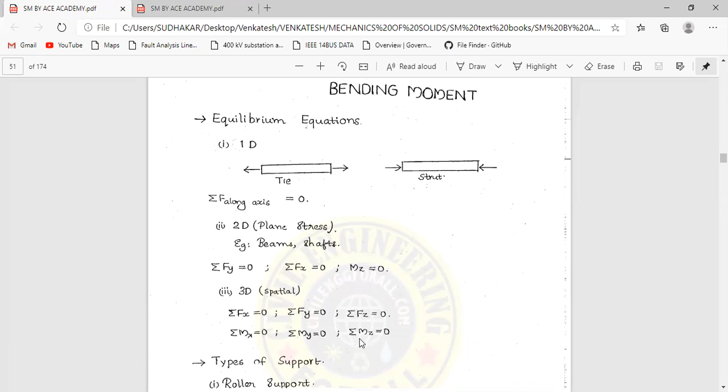For two dimensional, either summation of f of y equals 0, or summation of f of x equals 0, and moments about the particular z direction equals to 0. We have to consider three equations for the 2D case. If in case of 3D, we have to consider six equations. Six equations is nothing but the x direction, y direction and z direction, the forces along these three respective directions.

These respective directions: x, y, and z direction. So whenever for these 2D problems or 3D cases, we need to consider the equilibrium equations. Through these equilibrium equations we are going to find out the unknown values. Listen guys, got my point? I hope you understand.

So summation of f of x equals 0 for the 3D cases, summation of f of y equals 0 in case of y direction, summation of f of z equals 0. The respective forces along the respective directions equal 0, and at the same time the moments also: summation of moments about the x-axis equals 0, summation of moments about the y equals 0, summation of moments about the z direction equals 0. So these six equilibrium equations we need to consider for the 3D cases. For 2D cases, the three equilibrium equations we need to consider.

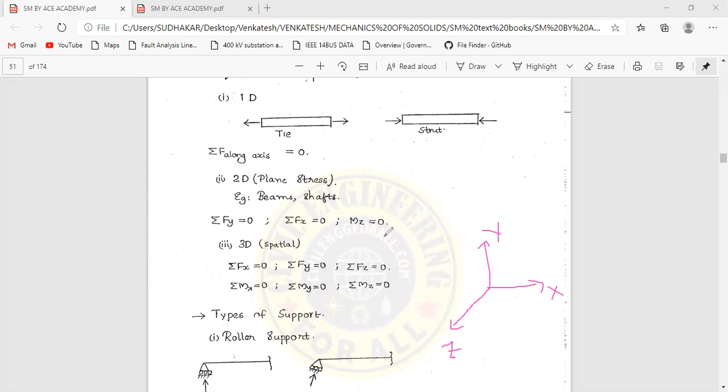Types of supports. First case, roller supports. The roller supports appear as shown in this display. So the roller support will be like this: a roller is there over which the beam is supported, and the roller can freely rotate about the base plane, about the base platform.

The next example is old bridges. If you have seen any old bridges, they contain some kind of rollers at the bottom of the beam. Some beams are there, some rollers are there under the beam, which tend to provide the main purpose of freely expanding its length in case of thermal stresses. In order to provide for thermal stresses we need to add roller supports.

Next one, hinge supports, and hinge supports are nothing but pin supports. In case of a roller support we have only one reaction force, which acts in the vertical direction, vertically upwards.

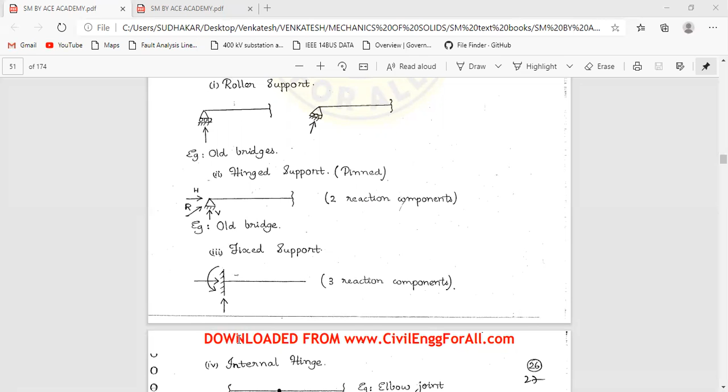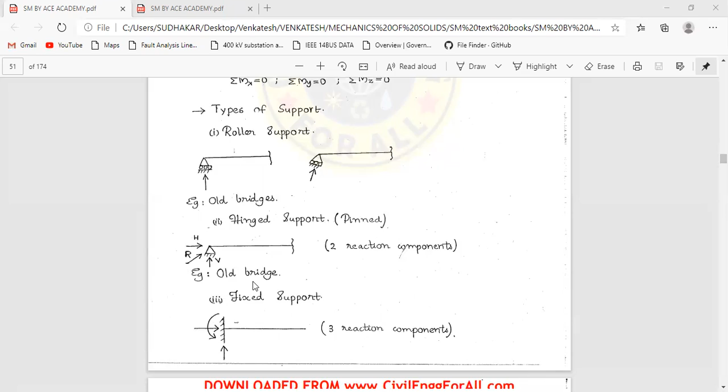Suppose one more support will be there: internal hinge. Is my screen visible please?

Internal hinge is nothing but, in between two members, we have a link which is internally hinged. This appears like an elbow joint for the human hand. Here the bending moment will be equal to zero - there is no bending moment there.

Shear hinges. The next type of support is shear hinges - axial shear hinges and transverse shear hinges. Whenever the shear force acts in a parallel, longitudinal axis direction, it leads to axial shear hinge. Whenever the shear force acts in a vertical or transverse direction, perpendicular to the axis - here this is the axis.

The shear force will also act in this direction, which is parallel to the line of action. This is the line of action. So here the axis of the line is in this direction, but the action of shear force will be in this direction, which is perpendicular to the previous one.

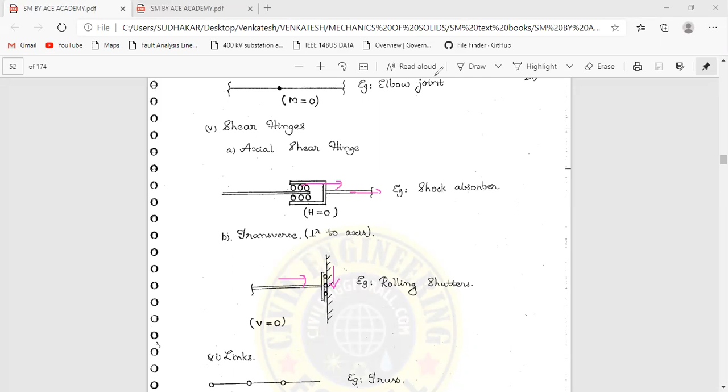Next, links - number of links. We can add any number of links based on the design constraints. The best example is the truss. In truss structures, like railway bridges which appear as trusses, number of links are added, used for making connections between two members.

So I have links like this one. Here I have one link, here one more link, here one more link, and here one more link.

So how many number of elements are here? 1, 2, 3, 4, 5, 6, 7. Out of the 7 elements, how many links did we use? 1, 2, 3, 4, 5. In order to make a connection between 7 members, we just use 5 links. By using the links we can make a joint also, as in truss examples.

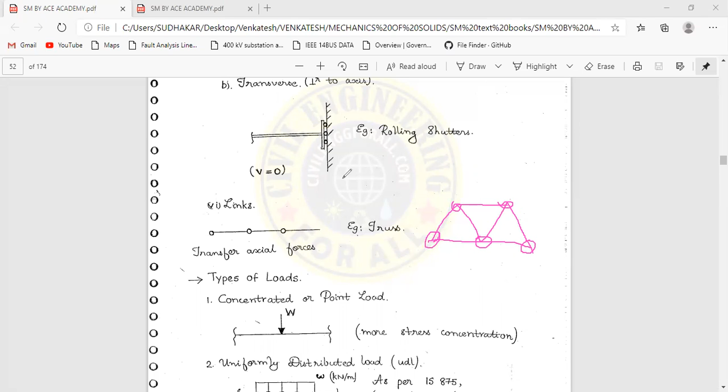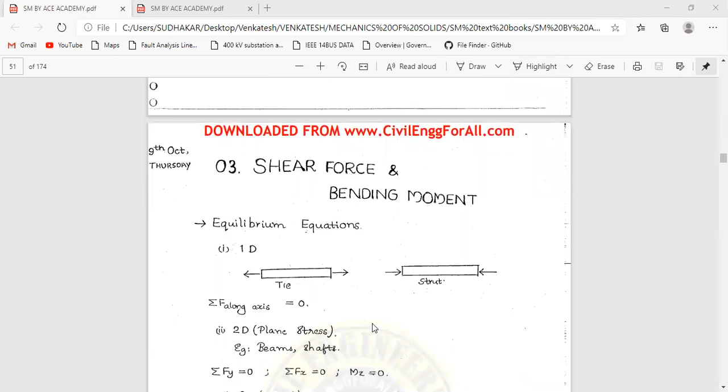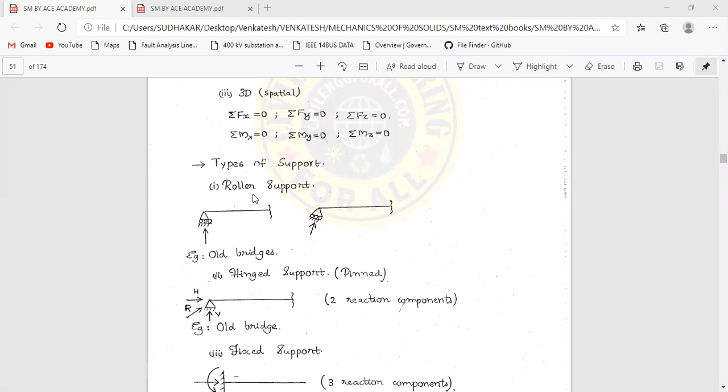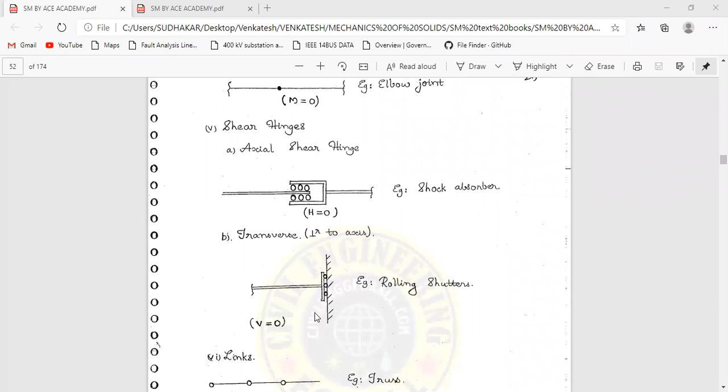So up to now we have discussed the equilibrium equations - what happens in case of 1D, what happens in case of 2D where we have three equations to consider, and 3D where we have 6 equations to consider, along with the types of supports: roller supports, hinged supports, fixed support, internal hinge or shear hinges - either axial or transverse direction - or links. This all comes under the category of types of supports.

And the next concept is types of loads. What are the types of loads? Concentrated or point load.

For example, point load leads to more stress concentration. The entire load acts on a particular point. The disadvantage of this type of load is that more load is concentrated on a particular point, which leads to more amount of stress developed at that point. This leads to failure. Whenever a high amount of stress acts or develops on a single point, it leads to failure. It is not suitable for practical applications.

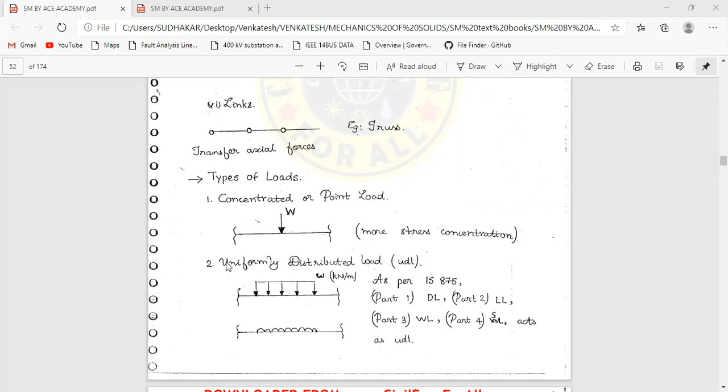The next type of load is the uniformly distributed load, the UDL. The load will be distributed uniformly throughout the length, or throughout some part of the length. So the units will be kilonewton per meter. Just have a look at the screen please. W equals to kilonewton per meter.

Here we have 1 meter. We need to consider 1 meter of length, and over that 1 meter of length, the load will be distributed uniformly, like this. This load we can call uniformly distributed load. The units will be kilonewton per meter, as shown here. Hope you remember that. We need to represent the meter also.

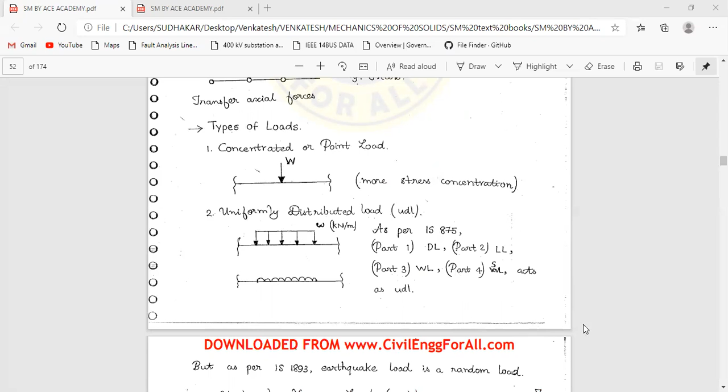As per IS 875, this is the standard representation. This is the symbolic representation of UDL. Either you can represent it by these rectangular shapes with arrow marks, or it may be represented by these curves. This is the UDL, uniformly distributed load.

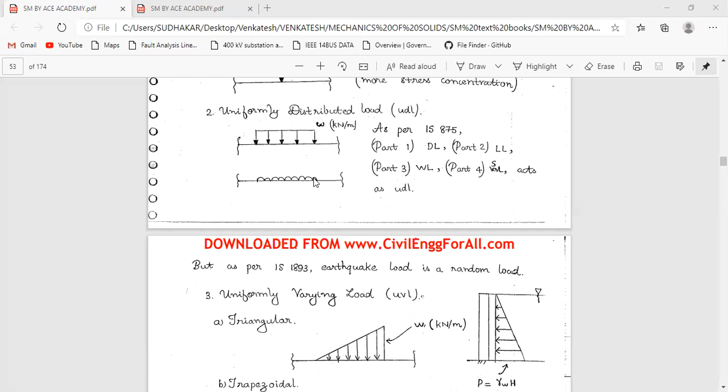But as per mechanical concepts, this is not that important. Another type of load is the uniformly varying load, either triangular or trapezoidal. For the span of some length, the load will be varying linearly, from zero. From zero, the load will vary, so you can call it a triangular load.

The units will also be kilonewton per meter. We need to represent, per meter of length, how much that load will be distributed, from zero to some amount of value. This type of load is called triangular.

And the next one is trapezoidal. Initially, at the initial span of length or span of the beam, the initial load will have some value. It does not equal zero. In case of triangular, the initial value is zero. In case of trapezoidal, the initial value of the load has some value - either it may be 10 kilonewtons, either it may start from 100 kilonewtons, or either it may start from 10 kilonewtons, or 50 kilonewtons, whatever it may be.

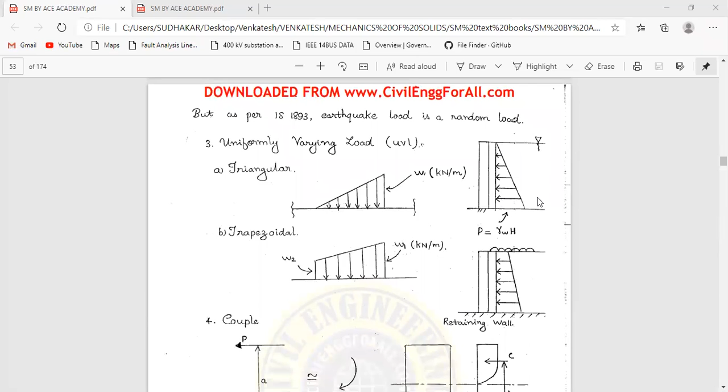Now the examples are, these are the two examples we will discuss later, in fluid mechanics. The next type of load is the couple.

Couple is nothing but any two forces having the same magnitude which act in opposite directions over the span of length. We have forces having the same magnitude but opposite direction, which act at a particular distance. The distance between the two forces will be 'a'. The amount of force will be 'p'.

So due to the couple, a moment will be induced. Moment M is equal to p into a, where p is the force, and a is the distance between these two forces. In practical application, if you consider a plate here, the shear force will act in this direction.

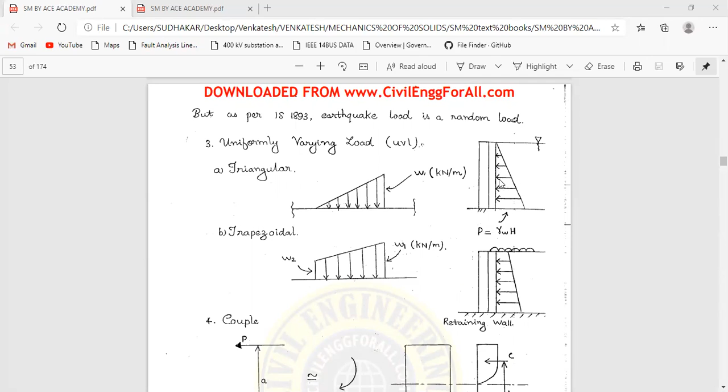And the next one is the bracket. These three examples are difficult to understand at your basic level - these are more advanced methods. If I consider this one, it will lead into fluid mechanics.

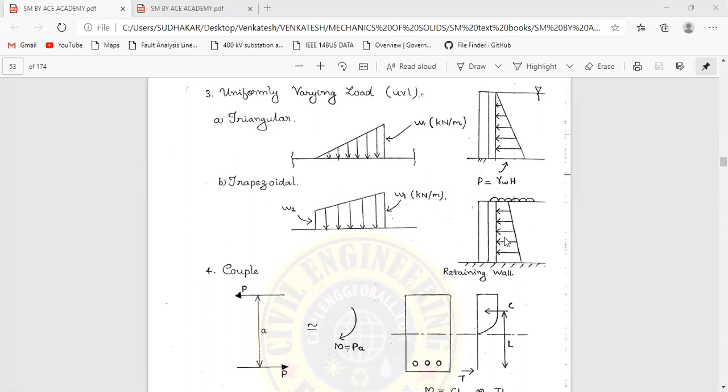We need to consider the amount of pressure in case of fluids, which is related to retaining walls and shear forces. We have better applications for easily understanding this.

The next concept is the bracket type of load. Suppose we have a bar or beam, and over the beam we have a bracket. Over the bracket, some amount of load will act.

So we need to shift the load from here to here. We don't have the right to transmit the same forces directly, but we may transmit them if we add one moment, which will be in this direction. I hope you understand this concept.

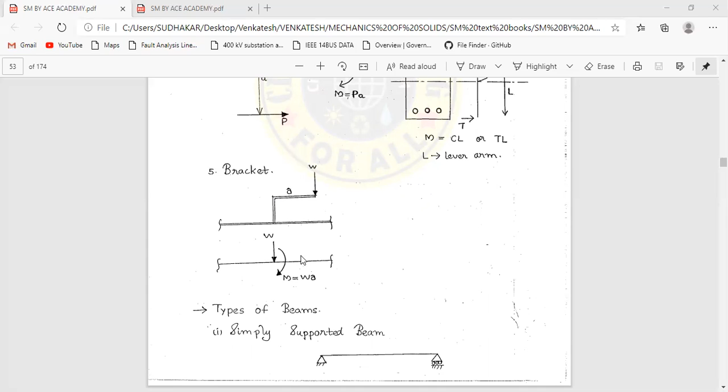In case of brackets, we have a bracket here, and over the bracket one load acts in this direction. We need to shift the load from this place to this place, and by transferring the load we need to add one more moment. Due to this unsymmetrical position, this force causes some moment in the section, which we need to consider. So the bracket load becomes M equals W into A.

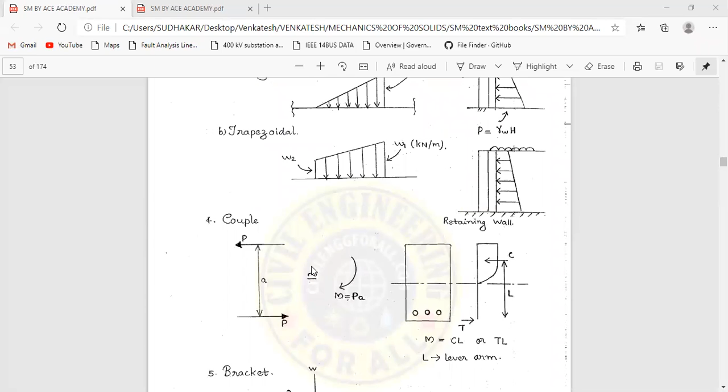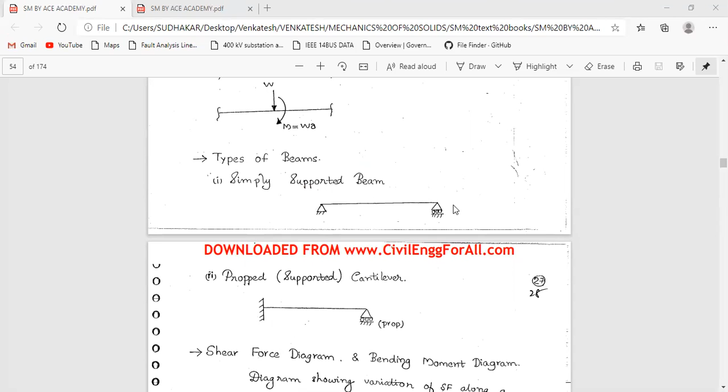So we have discussed the types of loads, and now the next concept is types of beams. First is the simply supported beam, which is supported by two pin joints or two pin supports. Next one is the propped cantilever.

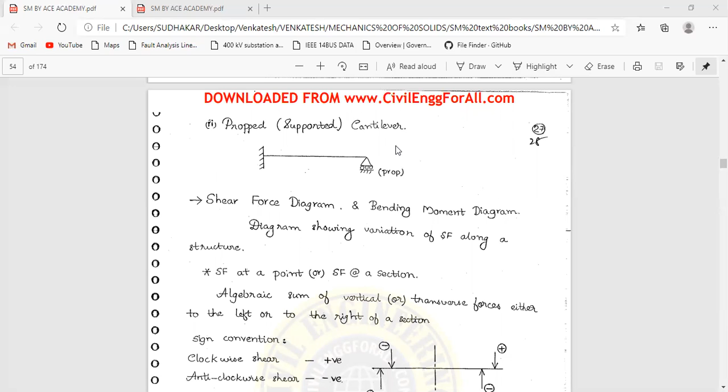A cantilever beam is one where one end is fixed and the other end remains free. When we provide a roller support to the free end, it is called a propped cantilever, with one more roller or pin support. So we have three types of beams: simply supported beam, propped cantilever beam, and cantilever beam.

Types of beams: the first one is the cantilever beam, where at the free end we apply some load. The simply supported beam is one where the beam is supported by two joints, two pins - either roller support or pin supports. In between these two supports, over the top surface, we apply a load. This is the cantilever beam, and this is the simply supported beam.

We also have one more beam, the overhanging beam. An overhanging beam is basically a simply supported beam with extra length added. The load acts in this direction, here and here, so a number of loads will be there.

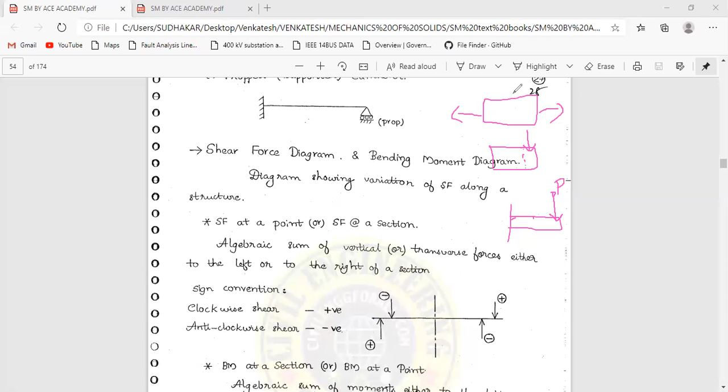Before going to that, we have to consider some sign conventions for the shear force. We need to consider two things, and the first is sign conventions.

Let's look at this screen. We have a beam here, and I'm considering a section. For the right side of the section, loads acting downwards on the beam are considered positive. Whenever forces act upwards, they are negative. Before analyzing the shear force and bending moment diagram, all downward forces are positive, all upward forces are negative.

If you consider the left side of the section, it's quite opposite. All downward forces are considered negative, and all upward forces are considered positive.

The sign convention is also related to the type of load: if the load is clockwise, the shear stress will be positive. If anti-clockwise, the sign convention will be negative. This is the anti-clockwise direction - the couple which tends to rotate the body anti-clockwise. This is the couple which tends to rotate the body clockwise.

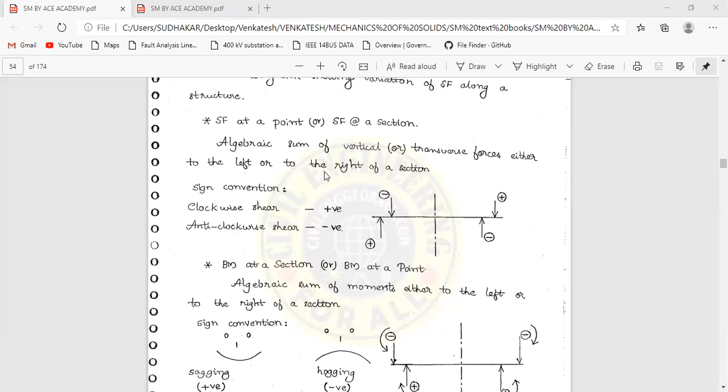At the same time, for bending moment at a section, before going further we have to discuss sagging and hogging.

Suppose we have a simply supported beam with pin joints at the ends. When we apply the load at the center point, the beam tends to deflect in this direction. Initially the beam is straight, and after the application of load, it gets deflected like this. This type of shape we call sagging - it's a simple representation resembling a smile, for easy remembrance.

Now consider a beam with pin joints arranged like this. When we apply the load in the downward direction, the beam tends to deflect in this direction, and this type of shape we call hogging.

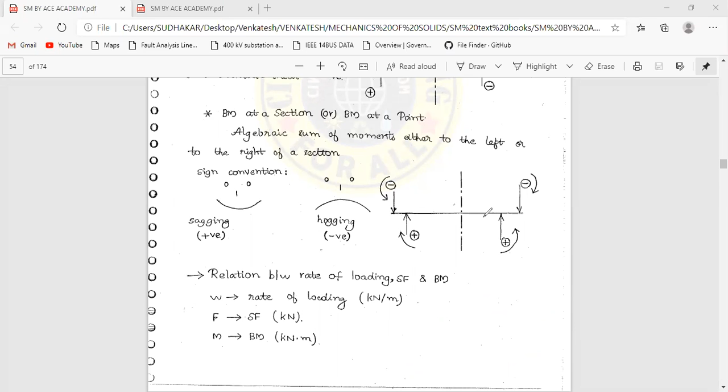For a simply supported beam, the type of shape formed by the load will be sagging. Remember these two terms - sagging and hogging. Remember these two concepts of sign convention; this is most important for solving the problems.

If you consider a section, for the right side of the section, all downward directions are positive and all upward forces are negative. If you consider the left side of the section, all the downward forces will be negative, all the upward forces will be positive.

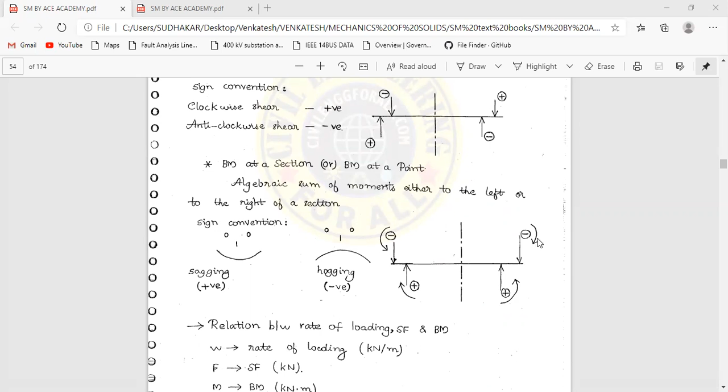For the bending moment sign conventions, all clockwise moments will be negative, all anti-clockwise moments will be positive.

What is the difference between these two? Let me describe, keeping aside the left side concept first and just considering the right side concept. For the right side, all the downward forces will be positive for the shear force distribution.

In case of bending moment, all the downward forces will cause negative, meaning downward forces lead to clockwise moments. That's why downward forces will be positive for shear force, but the downward couple will be negative for bending moment. Quite opposite, the upward moment will be positive for bending moment. So here we talk about forces, here we talk about moments - downward moment versus downward force.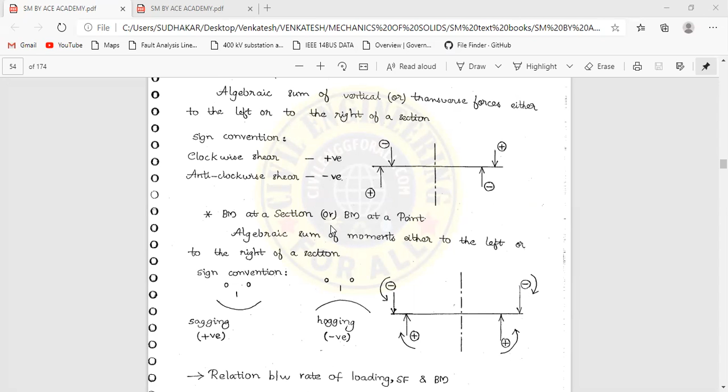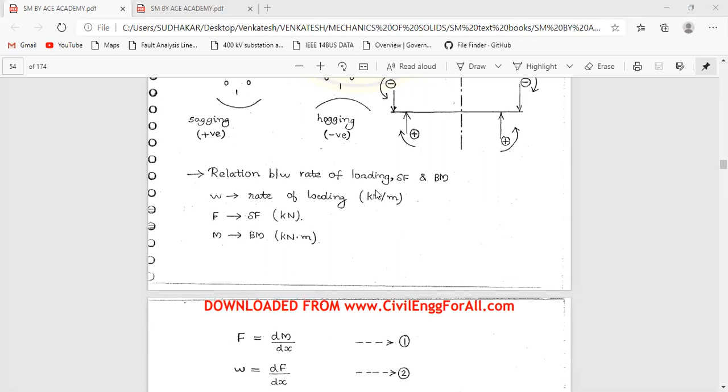Relation between the shear force and bending moment: W equals rate of loading in kilonewton per meter, F equals shear force in kilonewtons, and M equals bending moment in kilonewton multiplied by meter. That is the difference, just to have an understanding and remember that one.

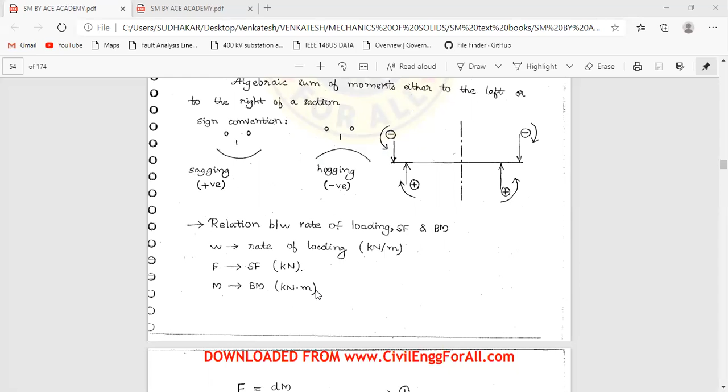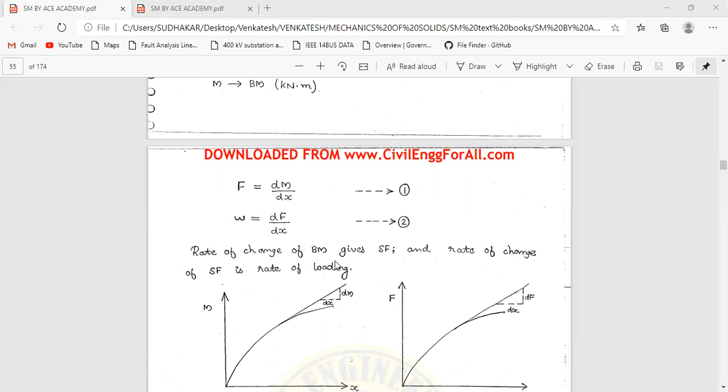The force equals dm by dx. W equals df by dx. Derivation of F is nothing but F equals dm by dx, which is the slope. In case of W, it equals the rate of change of shear force, the derivative of shear force with respect to x.

This is the graph for the bending moment, and this is the graph for the shear force. Before going further, let me give a small description of how to graphically represent the shear force and bending moment, and what is the common difference between these two.

For the bending moment diagram, the slope at any point on the curve - when you differentiate dm by dx at a particular point - it will lead to shear force. In case of the shear force diagram, when we differentiate df by dx at a particular point, it will lead to the w type of load. So the slope for bending moment gives shear force, and the slope for shear force gives the load.

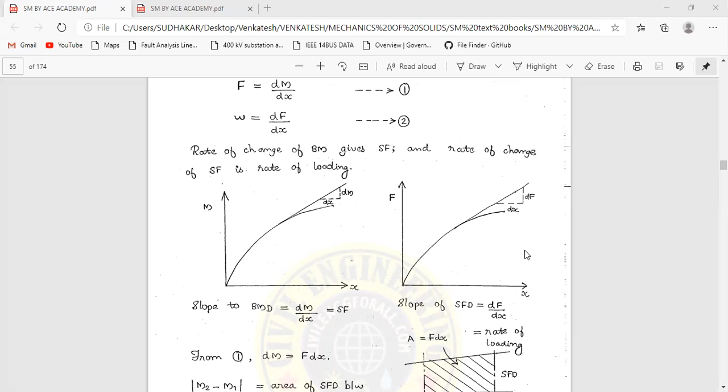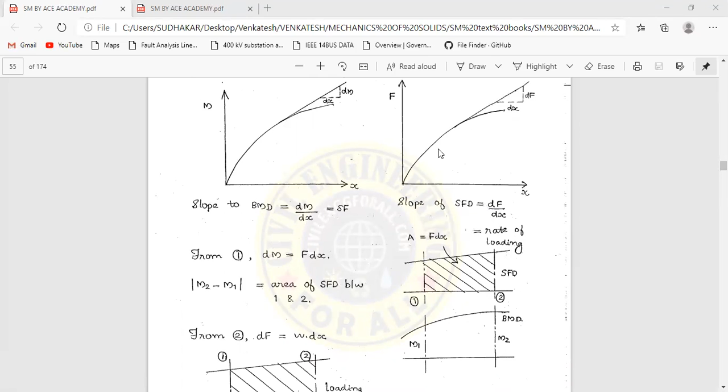So slope of BMD, dm by dx, is nothing but the shear force. The slope of SFD, df by dx, is the rate of loading. For bending moment, shear force will be obtained; from the graph of shear force, the type of loading will be obtained.

Suppose this is the shear force diagram and this is the bending moment diagram. Before going to that, let's keep this concept aside for now.

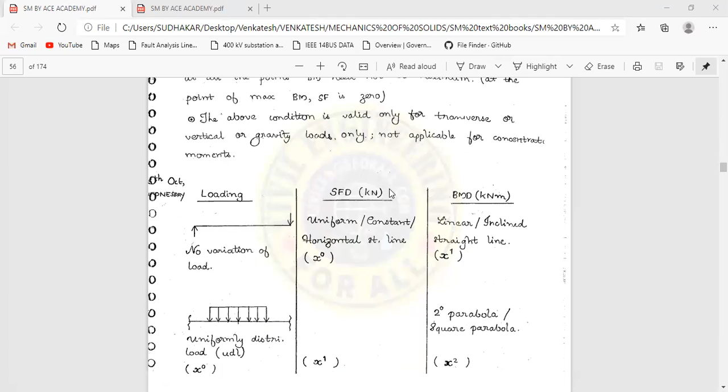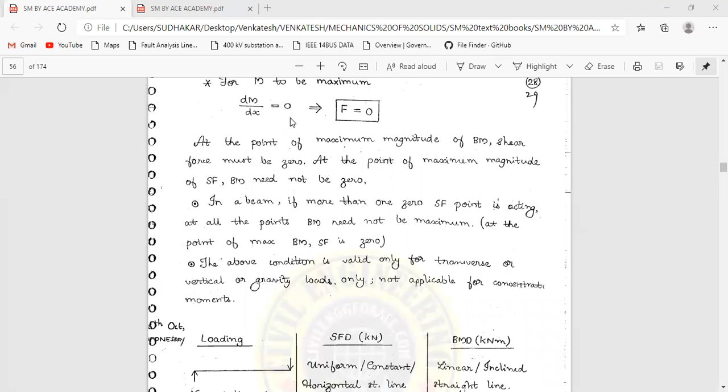For the bending moment to be maximum, in any case, the value needs to be differentiated and equated to zero. So dm by dx equals 0 implies F equals 0. So at the point of maximum magnitude of bending moment, shear force must be 0. At the point of maximum magnitude of shear force, bending moment need not be 0 - it's having some other value.

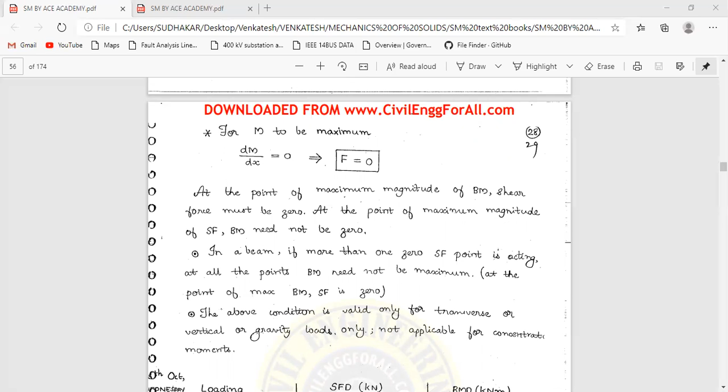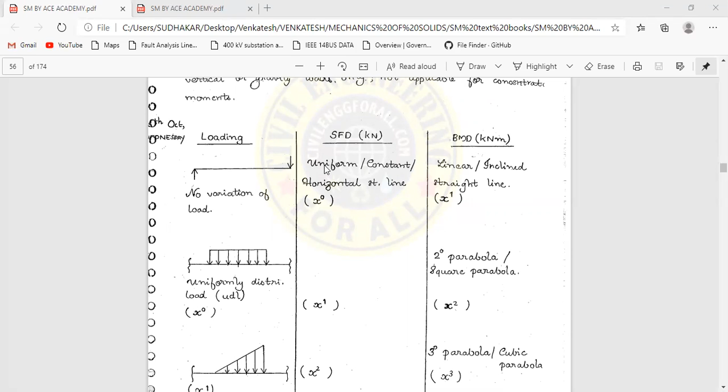We will discuss about this later, why this happens, because by showing some pictures I will explain these points. For the load, these are some assumptions like this. We will discuss these two points in the next class.